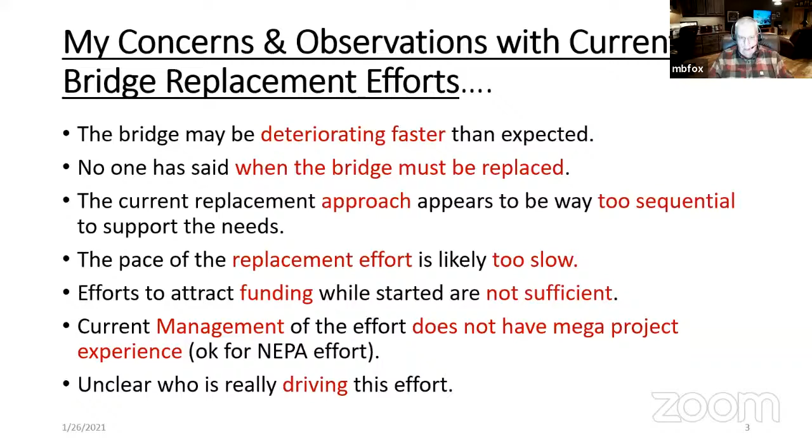The current management of the effort really doesn't have mega project experience. It's okay for the NEPA, okay for the short-term work efforts, but I think is lacking the real clear experience that you're going to need for your program long-term. And lastly, another observation is I don't know really who's driving this effort. It just doesn't come across that there's a single person in charge who's really working to execute this project in an expeditious manner. Next slide, please.

Key question that I really have, and I wish you would really think about: when does a bridge have to be further derated or replaced? It drives everything in your program. When do you have to have your permits in place? When do you have to award a contract? When does the contract have to be finished? When do you have to start this? When do you have to finish that? I don't know of any schedule that you have that really shows that need as being defined.

The answer to this is not easy to derive. It's really going to require an unbiased engineering evaluation and a realistic economic evaluation, because the engineering evaluation will say, hey, you've got a bridge that's degrading and you're going to have to do this to prop it back up. And you've got to have an economic evaluation to decide whether you can really afford to do it.

Now, I know that you went through this about 4 or 5 years ago, but I would really encourage you to get that updated and take a fresh look at where you are today. Has the bridge deteriorated faster than what you thought? What's it look like 3, 4, 5 years down the road? Are you on track? Are you going faster? Are you going slower? If you go to the next slide, please.

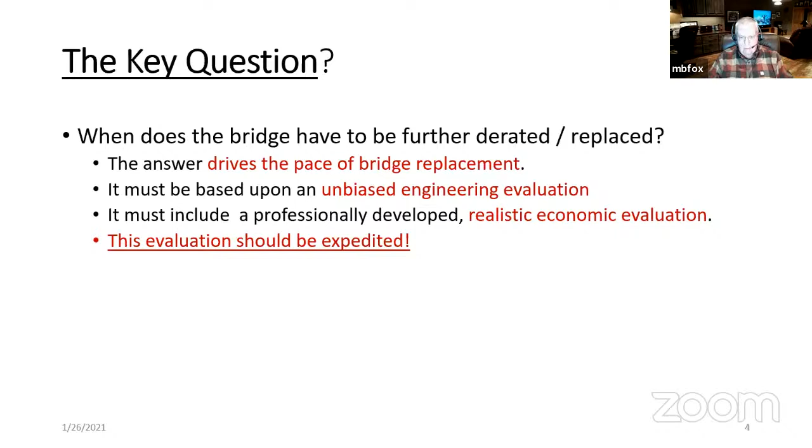So I came up with this, what I call a 9-component strategy. There's no real priority sequence here. I've shared a version of this with Kevin a couple of months ago, and he actually provided some input, as did, I think, Mr. Green, who works for Kevin.

The first one I'd like to talk to you about is determining the need and sense of urgency. That really comes back to what we talked about: when does the bridge need to be further derated or replaced? Without that, you really don't know where you are. If this evaluation says you're good for another 30, 40 years, hey, relax, you're fine.

If the bridge study says you really need to get it done in the next 10 years, you guys are in big trouble right now. So it's determining the need for a sense of urgency. And it's really going to require some real tough decisions by you guys, sticking your neck out a little bit.

But it's got to be done. And if things change, you can always change it, but you've got to put a stake in the ground. And I think it's probably going to say you need to replace it quicker than what perhaps you're thinking you are.

That's going to drive everything you do. The second thing I want to talk to you about is standing up a management organization that supports you, and it's your arms and legs in this entire effort. I think that management organization has got to be driven by a project manager, project director that's very qualified in this kind of work.

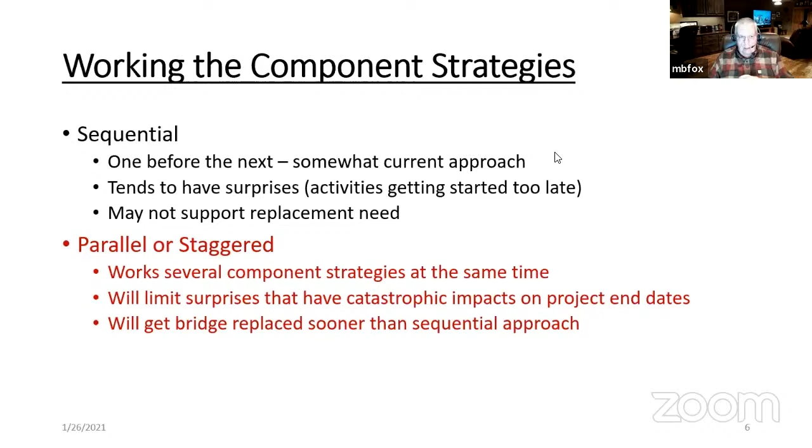Okay, so call for action. I would urge you to prioritize evaluating the current health of the bridge. Get that previous study updated, get new studies, whatever you need to get a real good picture of the health of that bridge and help you decide when replacement has to be in place, whether it's 10, 20, 30, or 50 years. You really need a document you can hang your hat on and use it, monitoring it yearly to see how things are progressing.

Once you decide what that date is, I would encourage you to back up or accelerate that date by at least 6 months, wholeheartedly if not a year, because things are going to happen to your project and things are going to slip. And if you set that date all the way to the absolute dead date, you're probably going to miss it.

I would encourage you, as the commissioners, to either agree or change, but take ownership of this 9-component strategy. Make it your own and really guard it, driving your program to make sure that all of these components are being worked properly.

I'd urge you to get a qualified management contract organization in place to help guide you. You've got this Bi-State Commission that could very easily be rolled up into this particular organization. Maybe you could second some folks from ODOT and Washington DOT into this program. You've got folks right on staff that you could use this approach as a career development opportunity for them.

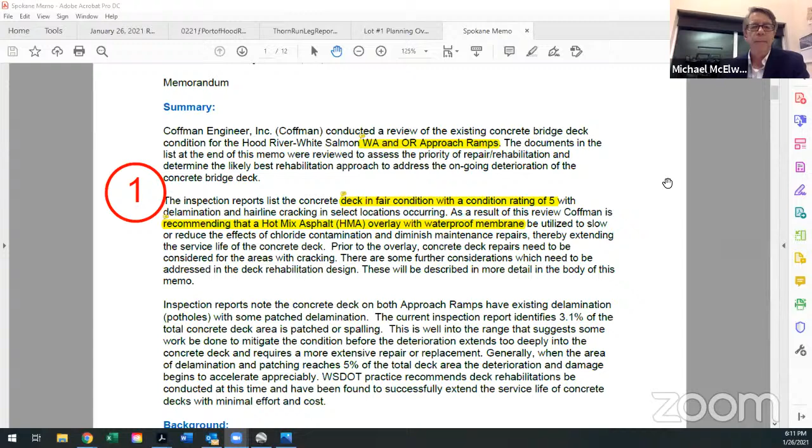All right, thank you, Michael. Am I coming through clear? Loud and clear, yes. All right, good. So I was tasked with taking a look through your existing port bridge inspection records and identifying the condition of the existing structure, mainly the Oregon and Washington approach ramps. You have the memo in front of you here.

I was going to touch on summarizing some of the key elements of the memo, and if we have time for questions, wherever it goes from there.

Having reviewed your existing information, the current condition of the bridge essentially has an issue on the approach ramps of spalling and potholes, requiring patching on each approach. You have a previous recommendation based on the deck inspection to do either a half or full depth concrete deck replacement. My recommendation in this memo is to utilize a 2-inch hot mix asphalt overlay with a waterproof membrane.

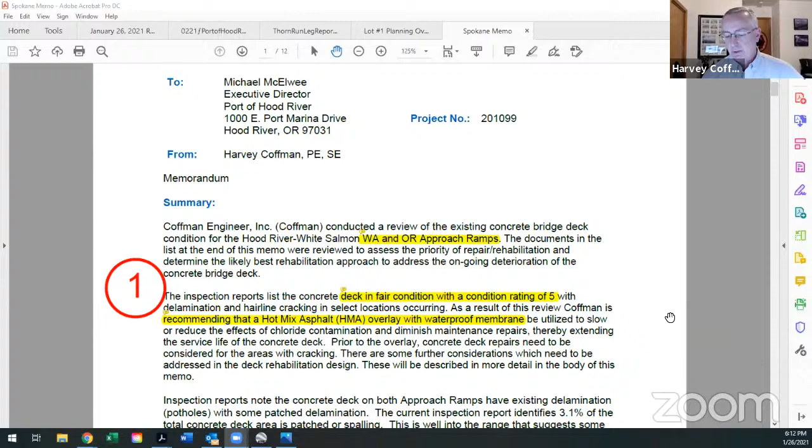The basis of my report tonight is predicated on the current bridge inspection reports, the deck inspection report, and short conversations I've had with John Mann and Michael about the situation out there. Those reports have identified that about 3% of the deck area is either potholed or has been patched, and they identified a chloride contamination concentration above the threshold that's also present in the approach concrete deck.

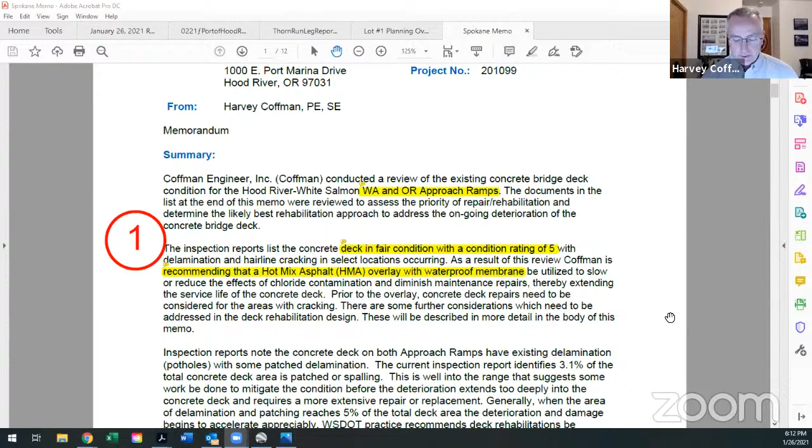So I've got references here in the memo for you to consider. If we can page down to item 3 - those reports identified about 3% overall damage and deterioration to the concrete deck. The Oregon approach has a little more, up around 6% deterioration.

If you look at a model like the one WSDOT uses for their deck program, they have some thresholds, which is the reason I'm reporting on the percentage of deck area affected. In this criteria, they tend to program their decks for overlays when they hit that 2% threshold. That gives them leeway to get the overlay funded and built before the deck area hits a 5% deterioration level. The reason for that is once you get to about 5%, the deck deterioration tends to drop off rapidly, getting deeper in the deck and making the overlay less effective.

At that point you're looking at something more along the line of a concrete half removal or a full deck replacement approach. In this concept, if you repair the damage and deterioration of the bridge deck and put that overlay on, you can improve the quality and condition of the deck and extend its service life.

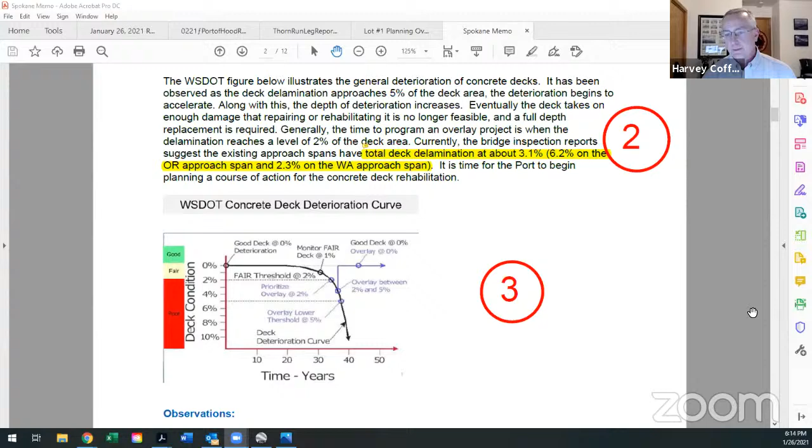In this case, you're right around the level where you want to start thinking about getting something in place to provide that overlay. These overlays can help mitigate moisture intrusion into the deck and smooth out the surface so the wheels ride smoother and the deck below is protected.

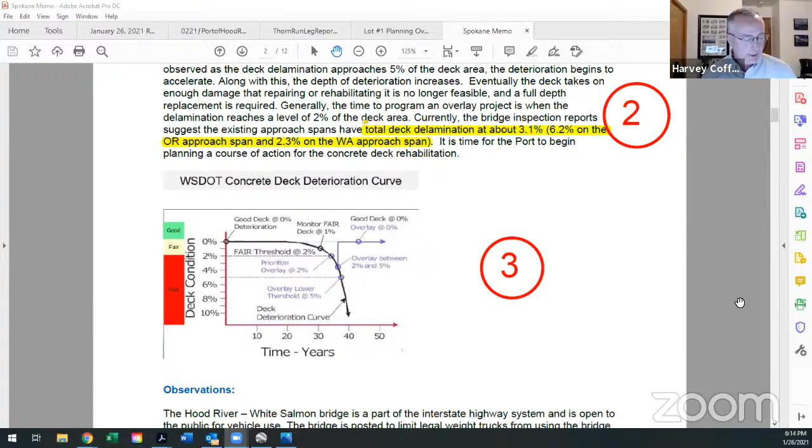If we could page down to item 4 - some of the results and findings of those inspections. The bridge is in a condition state that's fair according to the bridge condition code, or deck condition code, which usually runs from a value of 9 to 0, 9 being excellent, 0 being failed. That demonstrates there's still some residual strength and capability in your deck as it sits today.

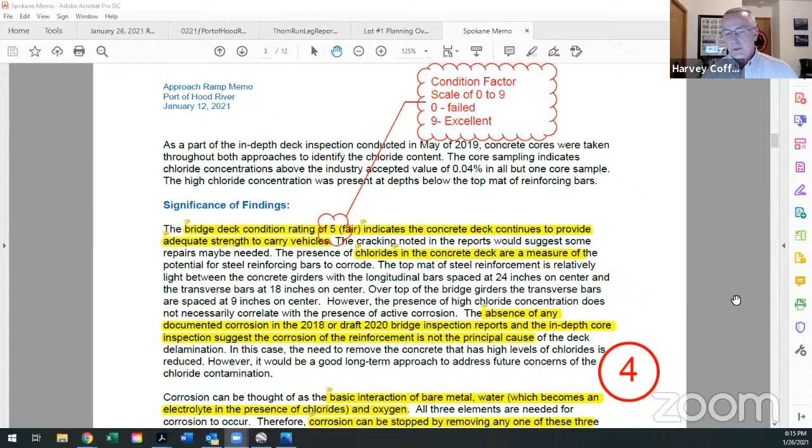The deck inspection report also identified these chloride contaminations, which should be considered in a deck rehab like this. However, the reports don't identify any substantial amount of corrosion going on in the deck, whether the inspection work just didn't look for that or they were looking for other things. So it looks like there's some possibility here of an overlay being a practical solution in this case.

If you think about corrosion as 3 basic components, it takes bare metal, water with electrolytes - in this case chlorides - and oxygen to create that corrosion. You can stop that interaction by eliminating any one of those 3 elements. In this case, we're focusing on eliminating the water that assists the chloride in corroding the bar, and that's the reason for the waterproof membrane and our recommendation for a hot mix asphalt overlay.

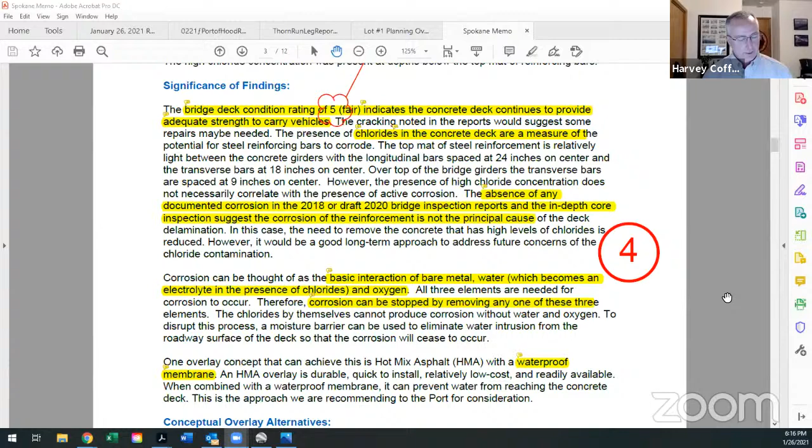If you can page on down to item 5 - to give you some consideration of the different types of overlays that might be practical here, I'm promoting and recommending the hot mix asphalt with the waterproof membrane. Two other possibilities are latex modified concrete and polyester concrete. Of course there's a variation in cost here - these are relative material costs, but the HMA is a very low cost product, very quick to put down and put in place.

The construction cost and the cure time are a couple of considerations to think about in this type of overlay. HMA doesn't require any kind of cure time, so you can put traffic on it almost immediately after construction is complete and that mix is cooled down.

Latex and polyester have other constraints applicable to conditions like rehabbing a bridge deck. They help reduce the weight involved, and can also have extended durability or lifespan. In this case, you're looking for something that's going to get you about 20 years. HMA is very capable of doing that, but with the price factor so low, you could actually probably get away with doing an HMA twice and still be at a lower cost than the other two overlay types. That's part of the reason for recommending the HMA overlay.

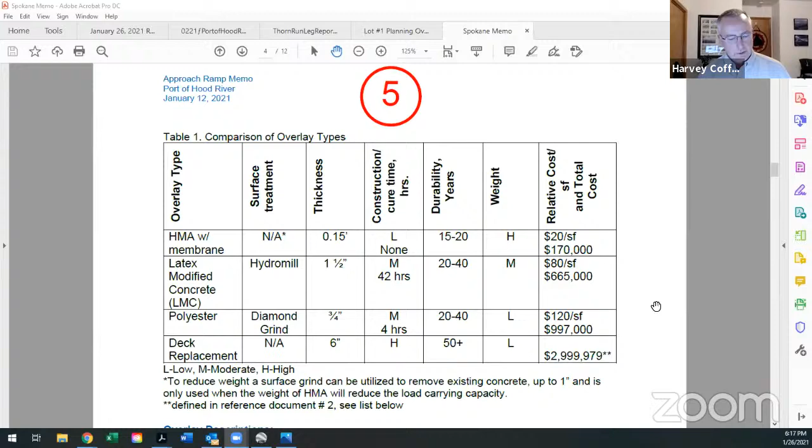You can see the relative cost there. The total cost I'm showing would be for something of the magnitude we're looking at in this project. The deck replacement price was pulled from the previous deck inspection report, so it gives you a sense of the magnitude of variation here. I think the total construction cost for an HMA might be in the $350,000 to $400,000 range.

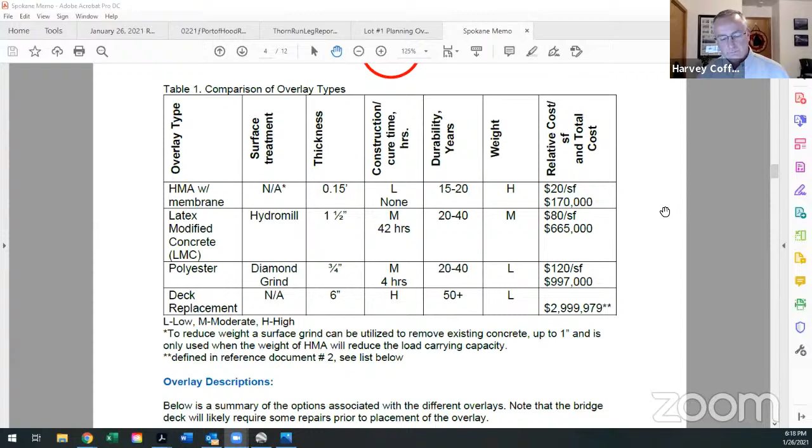We could move down to item 6.

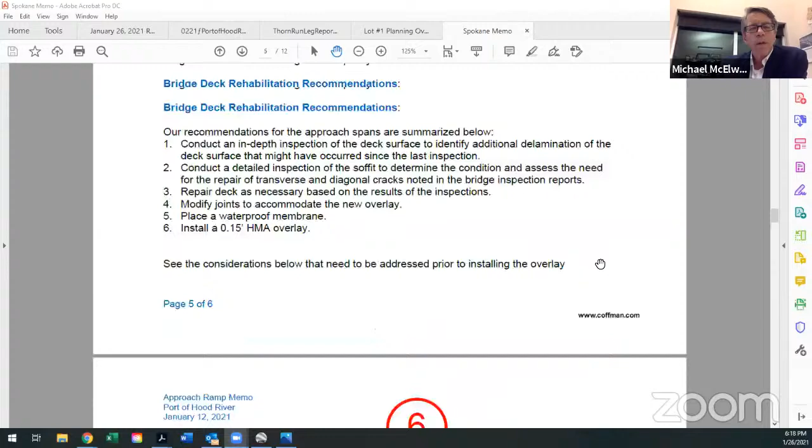Harvey? Yeah. Could you just clarify that last statement you made on that chart? Sure. Did I hear you correctly that the roll-up number ballpark for HMA with membrane was what? 400,000? Yeah, 350 to 400,000.

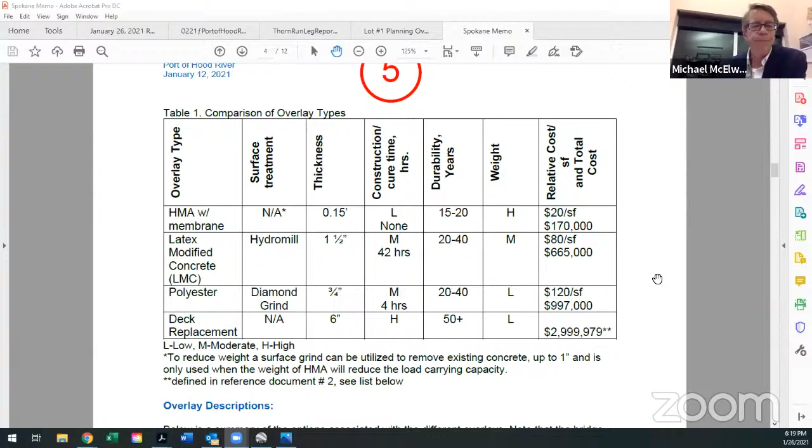I put a quick magnitude cost estimate together at the end of this memo for you, just a quick magnitude to compare relative to what you've been given previously. So am I misreading or misunderstanding? The HMA with membrane on your chart has a ballpark of, say, call it 200,000. Well, these are more based on relative material cost between the three examples I'm showing here. Okay, thank you. So there are other factors that go into the construction of that.

Some things to consider in the application of an HMA, in the context of the recommendation I'm providing, is to go out and put about 2 inches of HMA on the existing structure. There are some things to consider as a result. One is the weight of the overlay—adding that additional weight to the bridge, which isn't necessarily that much, especially given you have an older bridge designed for a lighter truck. However, with the weight restrictions you have in place and will probably be putting on the structure soon, it gives enough capacity to absorb that additional weight on the concrete approaches. But that's something that needs to be considered in the design of this process.

Expansion joints would need to be modified to accept that additional thickness in the overlay. That's typical for a project like this. However, there are also some expansion joint repairs that have been identified, and this could be a time to include those as part of the project.

The weight of the construction equipment, given the restrictions around the bridge and the type of work involved, means you have to look at the type of equipment used to complete the construction. Some of this equipment can be relatively heavy, so as part of your construction contract, you want to identify and limit those types of equipment and how they deliver material on the bridge. You wouldn't be able to use vibratory type compactors, which is typical today, so we have to right-size the rollers to get the right compaction on the bridge without exceeding capacity.

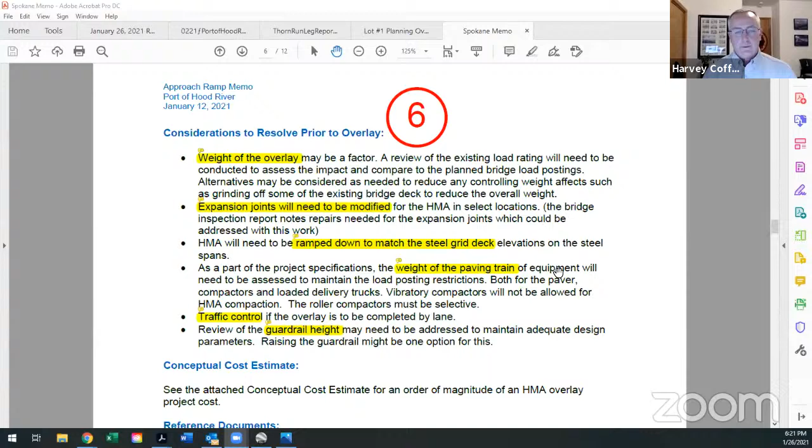And the last thing here is the guardrail height. The guardrail height is important to the functionality of the guardrail, and we'd want to look at the overall guardrail height and how it interacts with the reduction in height related to the application of the HMA. There are a few other factors that play in here, but those are some of the key elements I'm summarizing for you tonight.

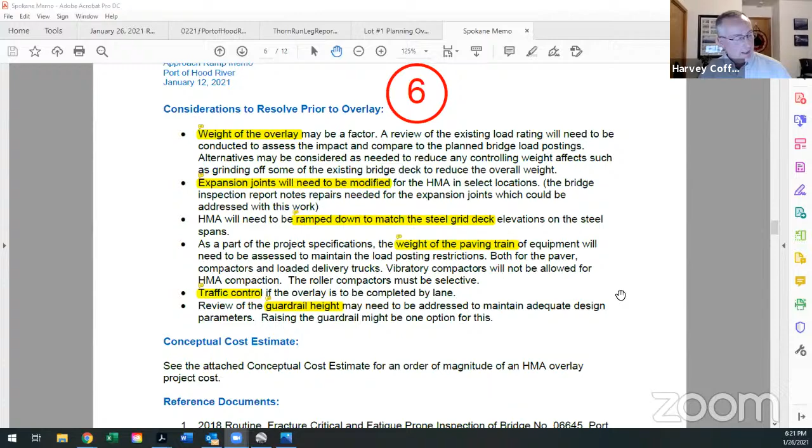The last piece I have is some pictures that John Mann provided related to repairs he did here a couple weeks ago on the bridge. I just want to share that with you so you get a visual idea of what you're facing.

This is a patch location John had taken a picture of. It looks like most of the loose and broken surface concrete has been removed. You're looking down on the concrete deck at the top mat of reinforcement in that deck, and you can see the bars don't look heavily corroded at this point—there is some light corrosion on that bar.

I don't believe that's necessarily enough corrosion in this case to have caused this failure. I think John was saying that the wheel lines are rutted, and the ruts are probably getting extensive enough

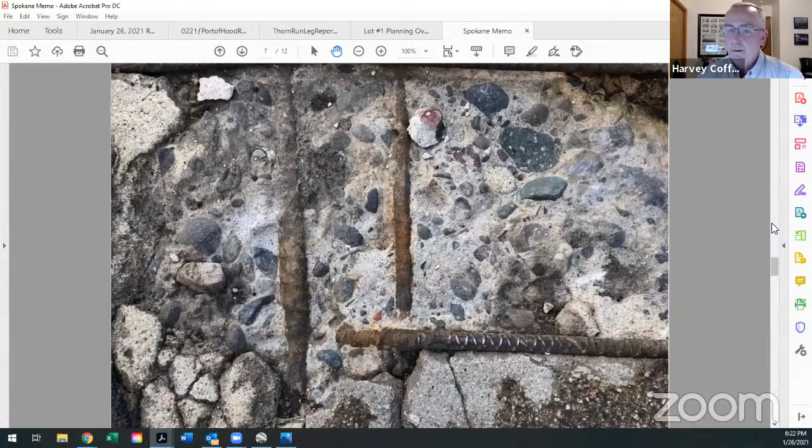where the cover here is thinned down enough that the tires are just rolling over this or breaking it up. You do see pretty good concrete here though. The concrete that remains, the rest of the thickness of the deck is in good shape. You see some fractures in the aggregate, which is a good indication that the concrete matrix is strong enough to break the rock. So you've got pretty good underlying concrete deck there. Another indication that it's still an appropriate time to utilize the overlay process and a waterproof membrane to extend the life of this deck.

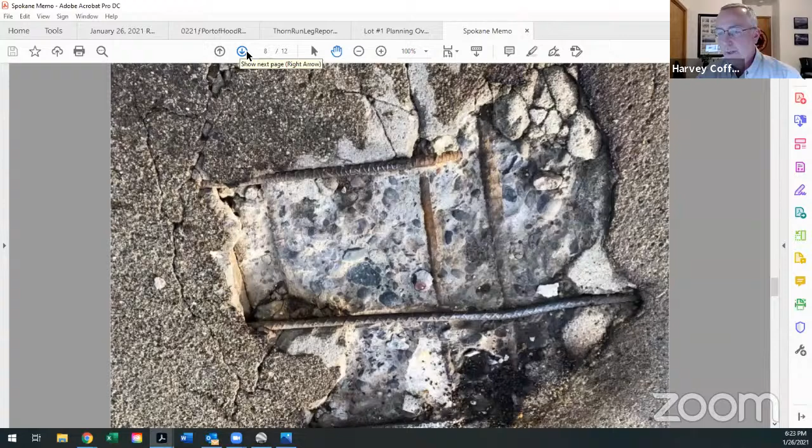I think there's 3 other pictures there. They're really going to show you about the same concept. John, I think these are all cleaned out, or is this the way you found them? That's the way we found them. And then all the little loose edges that you see were there, those all got chiseled out.

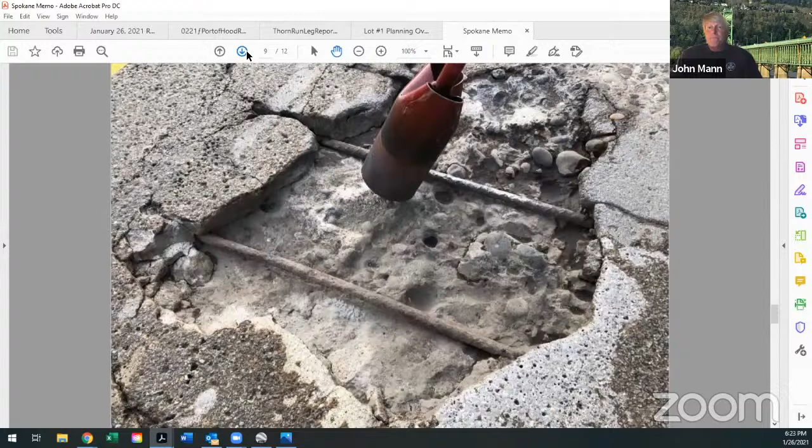Now, is this a previous repair that has broken out? No, you're looking at what's left of the old overlay, the last overlay we did about 6 years ago. That surface just wore off so quickly.

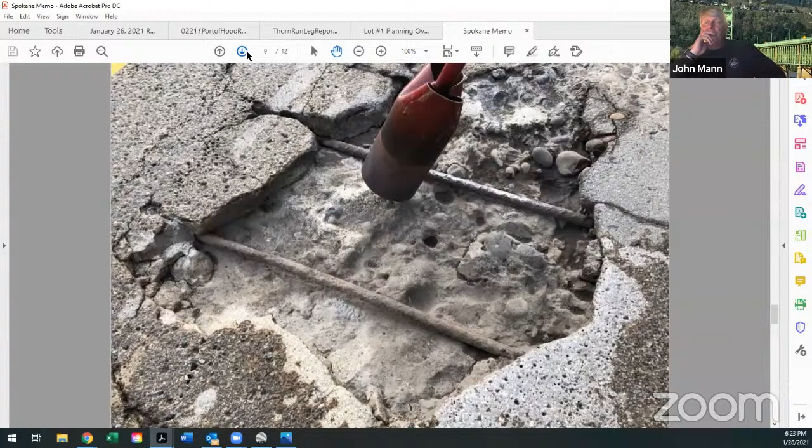So part of the concept here in the process is going out and checking this deck to identify any additional spalling and patching that would be needed just before you put the waterproof membrane down and put the overlay on. Once you get that overlay on top, that tends to lock the deck in, reduces the wheel pounding, it smooths that surface out so the wheels aren't pounding anymore. When you get a pothole like this, the wheels are falling in that hole and they're pounding and bouncing on that deck, and that just exacerbates the whole condition out there.

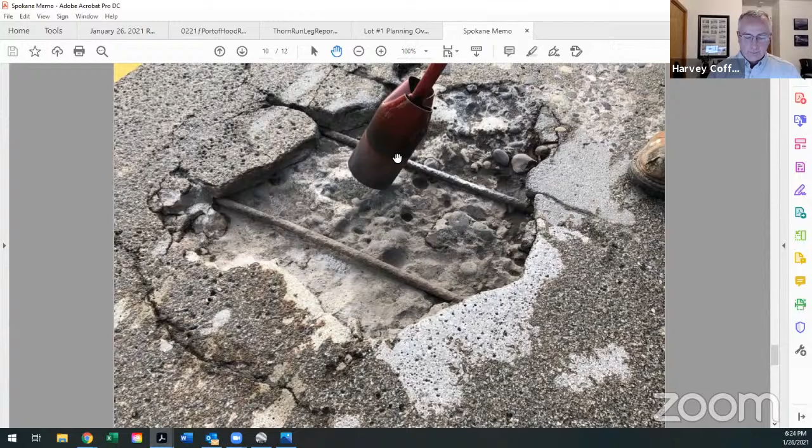So that's a brief account of the memo I provided you. I'd be happy to discuss it further or answer any questions at this point.

seal up that concrete so the moisture wouldn't get into it, you can see that it's worn off. The wheels, more likely the studded tires, are tearing that up and have removed it. So it's not effective at all.

This is Commissioner Shepard. I seem to remember some of our presentations in the past had some of the damage caused by the salt and the chemicals put on the roadways. How does this hold up to that?

So that's the idea behind the membrane. The chlorides in the deck are going to remain in the deck. You really can't get rid of that. But you need the water in there, the moisture in there, along with oxygen, to help create that and cause that corrosion to occur. When we put the waterproof membrane down, that seals off that deck so the water can't get to the concrete deck any further. The asphalt's naturally porous, so you've got to have that there anyway. Otherwise, you're going to hold that moisture against that concrete and it's just going to make it worse, faster. So the waterproof membrane takes care of that and prevents that water from getting down below the asphalt layer.

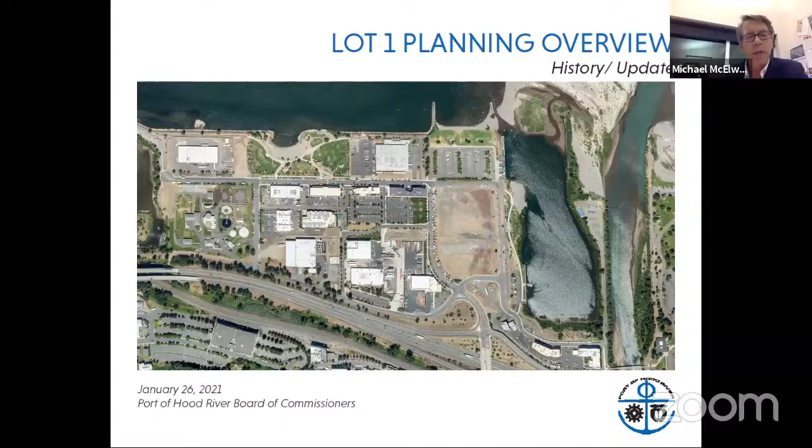So this is 2005, 2006, the way the waterfront looked: no Second Street, no park, no subdivision. The port's boneyard was at the corner of 2nd and 8th and Portway, where the Halyard building is now. If you look to the right of Nichols Basin, you could drive down to a really rough gravel area next to the water.

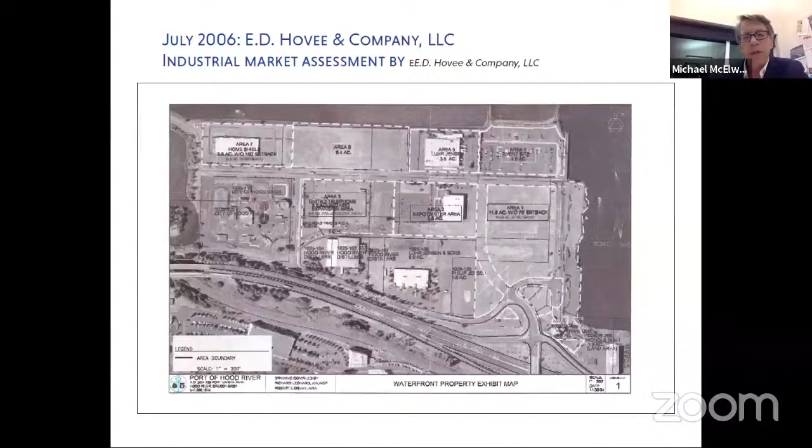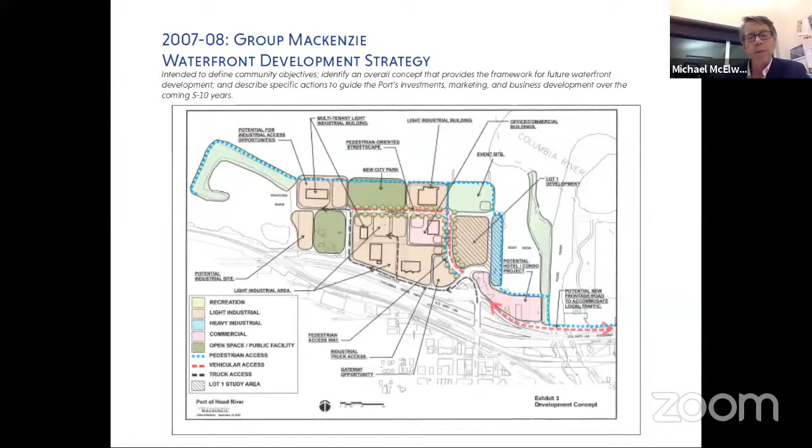A couple of things I want to point out. You see the hatched area, that's Lot 1, and that was specifically called out as a study area, thus the hatching. Then you see the note down where the pinkish area is, where the current hotel is. That was anticipation of the zone change that City Council was then to implement, changing it from heavy industrial to commercial. At that point, the blue area that parallels the west side of Nichols Basin was also zoned heavy industrial. But the major determination was, and Commissioner Streich will remember this, that the strategic approach was to focus away from the water and focus on the area where the current Halyard building is, where the boneyard was, and that stretch between 8th and 2nd, including the Expo Center. That became the focus of the commission's efforts.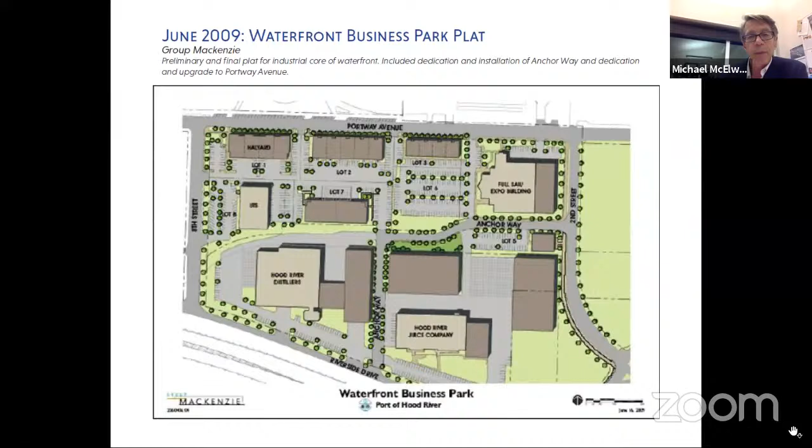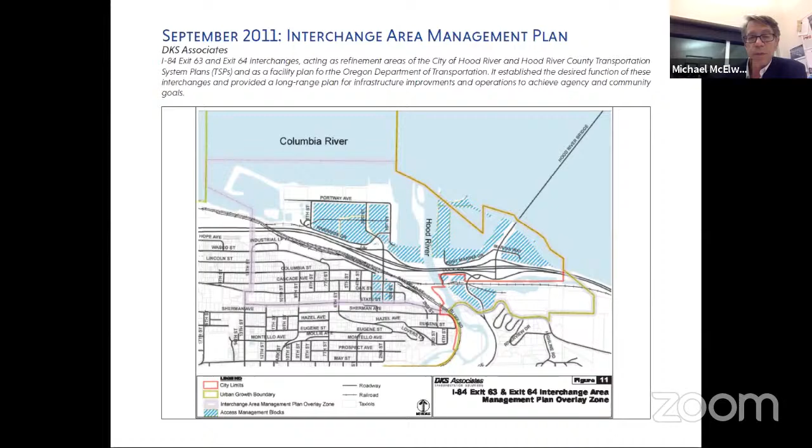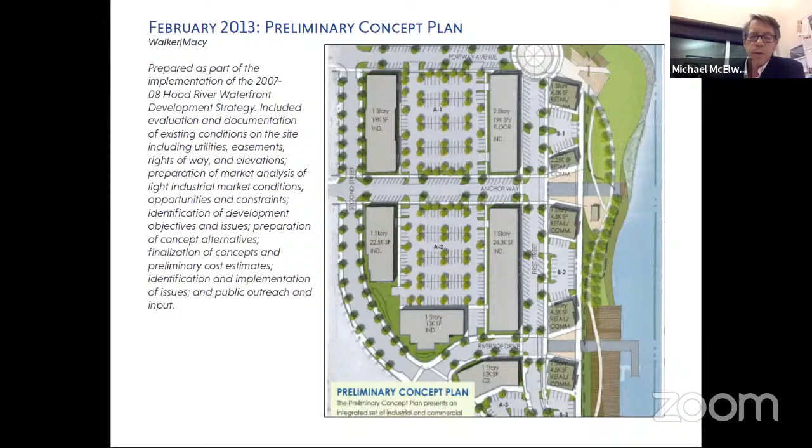Important to point out here: the same approach of putting buildings next to the street, the pedestrian environment, internal parking, and the really important factor of having Anchor Way run east-west through the site. Importantly, you see the nod to smaller commercial buildings in a row, north-south. That was a really important factor, and frankly drove a lot from public input, longstanding public input, to diminish the heights of buildings the closer you got to the water, and really create a strong pedestrian environment that intersected or interacted directly with the recreational and bicycle-pedestrian imperatives along the water.

Next. Then the commission believed it was strategically important to focus on that edge along the Nichols Basin, in a way to set the edge, but also demonstrate to the community this really strong commitment to that ped-bike corridor and water access. You see here there's the Anchor Way in concept form, also running east-west and terminating in a pedestrian plaza, a portion of which is there now.

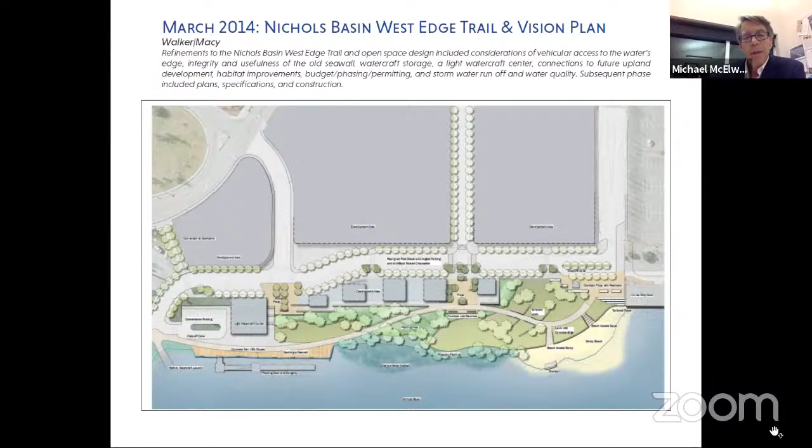And now you see there's a real interaction between this phase of work and the next step, which is the waterfront refinement plan, because what you see is now fewer buildings, smaller buildings, commercial buildings along the now relocated First Street, but certainly pulling back from the event site south. So you see this broad sweep of the park, or future park, coming up around and having direct access to First Street - a really important urban design concept that was strongly messaged to us through the waterfront refinement plan.

Next, and there's a lot to go into here - a multi-year effort.

The waterfront refinement plan was intended - and frankly half of it was paid for by the port - in order to define, maybe not once and for all, but to really fix on what the zoning is, what the legal and dimensional controls were, so that the port and other private investors had certainty for the context they were working within. What this shows is some sub-areas that were identified within the waterfront refinement plan area that had particular focus or attention, and in most cases, specific zoning changes that accrued to those specific sub-areas.

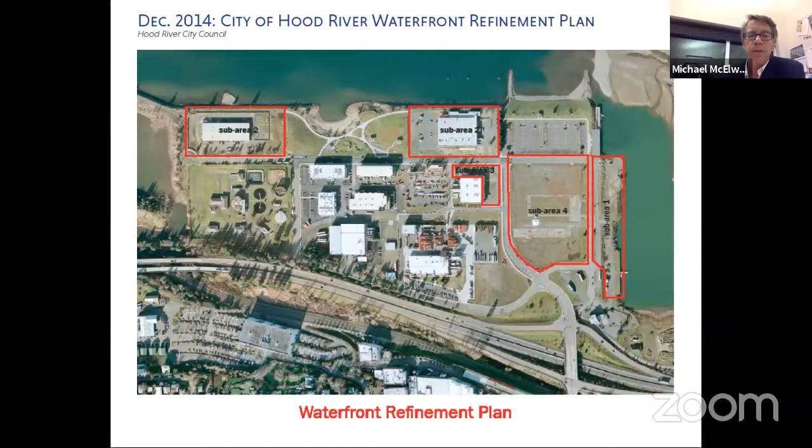And now here you see the concept plan that the Port developed actually became part of the zoning code. This is specifically referenced in the waterfront refinement plan and reflected in the zoning code. This is a sub-area development standard for developing smaller buildings. Though the zone didn't change from light industrial, it has an overlay that effectively allows commercial or retail buildings within a very specific defined limit to be allowed.

So there you see that pullback from the event site south, so that sweep of Nichols Basin Park area can confront, or be adjacent to, First Street. You see a relocated First Street. You see a nod to a future light watercraft facility where the Nichols Basin dock is, and that plaza at the termination point of Anchor Way is developed further - again conceptually recognizing the possibility of a public restroom at that point.

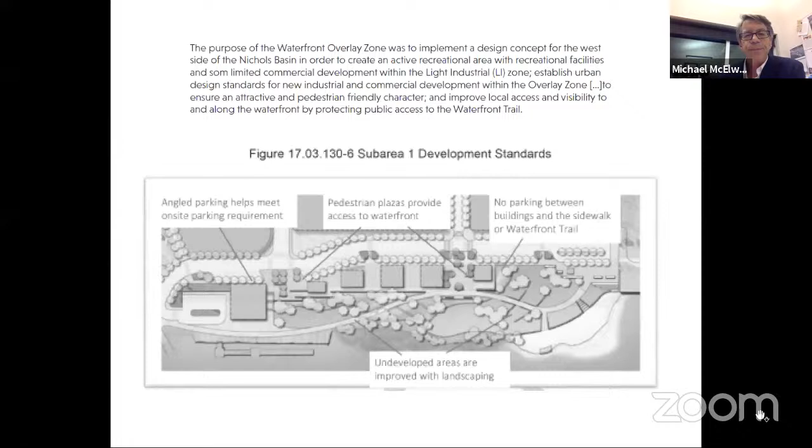Next. And so then the Nichols Basin Trail was developed. It basically comes right out of the zoning code, which comes right out of the prior planning work that the commission developed. That was constructed around 2015, with a really significant public State of Oregon grant that helped build that. Next.

Okay, the next major step was the Lot 1 development plan. This is where we wanted to go much further into the specific layout, utilizing not only the zoning code coming out of the refinement plan, but also the essentially self-imposed design guidelines.

So this is just a concept diagram on the left, which reflects the urban design principles: full-on pedestrian access, internal parking, buildings along the street. You see now the addition of the so-called 'swale,' which runs north-south directly through Lot 1. It's not only a pedestrian bicycle corridor, but a signature feature for Lot 1 reinforcing the commitment to sustainability, since it's an organizing principle for stormwater collection and groundwater recharge, etc. So a lot is behind that diagram, and it's reflected in the more refined concept plan to the right.

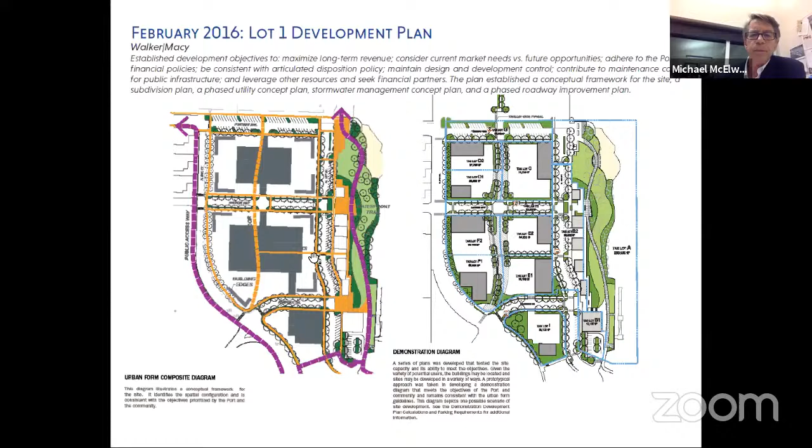I'll put this in because it's a nod to those essentially self-imposed design guidelines that the commission said were important and reflected community input. It was implemented and enforced through disposition and development agreements with individual developers as they constructed buildings in the waterfront business park. It's a commitment to sustainability, to the pedestrian environment along the street, etc.

And also a commitment to festival streets and really multi-use areas, plazas, and sometimes the street can be blocked off, a commitment to access to recreation and all that.

Okay, so now about the same time as we developed that last concept plan, Key Development retained an architecture firm in Portland and took a really hard, long look at Lot 1 from their perspective. What I've pulled out are just, say, 4 slides, but this was a really detailed presentation. It was quite impressive and remarkable in the amount of time they spent.

They looked at the context of the gorge, the environment, and the history, and they looked at the design inspirations, design imperatives, and such. This was then presented to the commission to allow them to see what their ideas were.

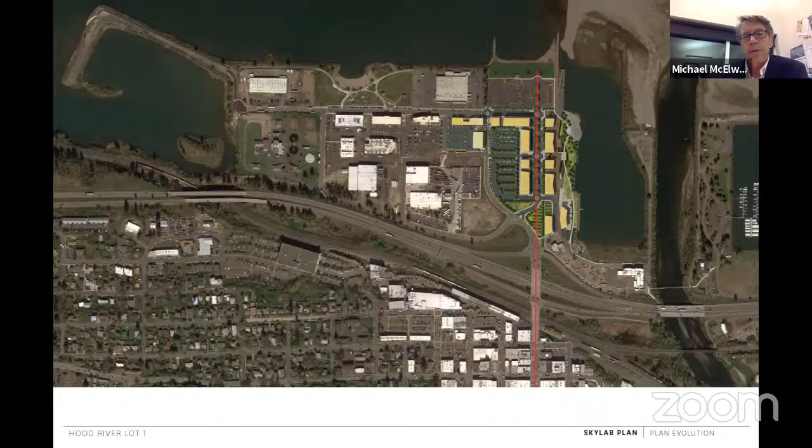They've organized that around that corridor, and they've essentially co-located the small retail or commercial buildings from the prior concept into larger two-story structures, so that both sides of the street are essentially taller, denser buildings, with a combination of ground floor retail and upper story commercial or appropriate industrial businesses.

This is a closer look at that. You can see there's a lot of eye candy here, which is not a criticism, but there's a lot here that is very, very unlikely to be implemented. But you can see that organizing principle of a relocated First Street, and you can see that two-sided street with tall buildings, not the shorter ones on the Nichols Basin side.

The concerns about this layout are many, or at least they're important. This aggregates most of the parking in one large parking lot that borders Second, which is sort of the major gateway to the waterfront, and that was a concern.

The fact that the buildings along the east side of First Street don't conform to the zoning code, and in a way, almost more importantly, they create that taller, denser wall along the water's edge, or near it, that was so important to so many people before.

Access to the site is essentially a reconfiguration of the Riverside and Second intersection, which would require significant approvals and use of ODOT property. And importantly for our work looking ahead, Anchor Way, that east-west extension that bisects Lot 1, is not in this in a way that would be approvable by ODOT or the city.

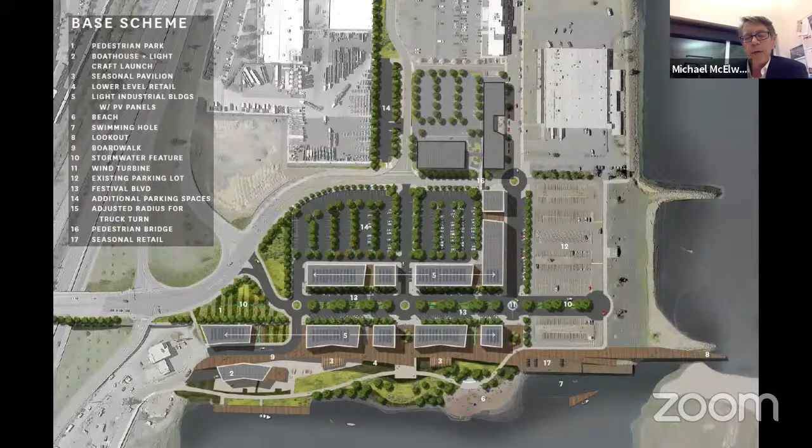So this is looking back to the prior plan the port developed, which is in some ways pretty consistent with the Skylab plan. It has a lot of the same things, but it reflects the zoning code and its limitations. It acknowledges that Anchor Way is an important component of any development or build-out of Lot 1, and it retains that two-sided street, First Street, but recognizes the strong desire to make sure buildings along the water's edge are smaller, pedestrian scale, with amenities connected to the bike path.

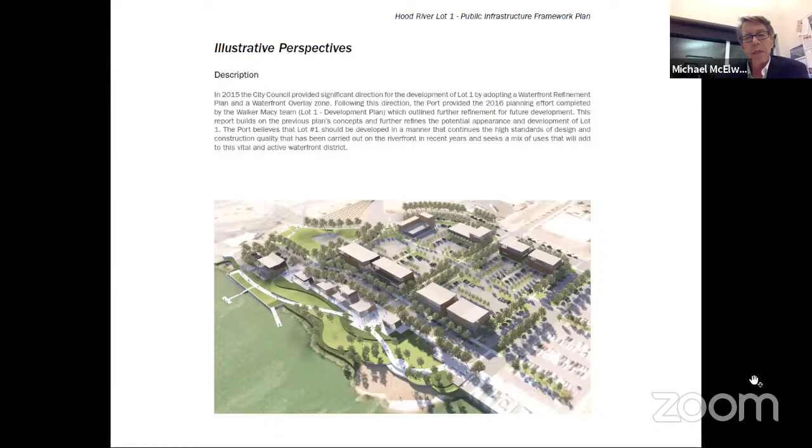So the next step was the development of the infrastructure framework plan, which said based on that planning work, here's what we have to develop or anticipate in order to implement the plan. I won't go through it all, but you've seen this before - very significant, probably $7 or $8 million worth of hard infrastructure, and we identified $5 or so million worth of soft amenities: increased pedestrian access, boathouse, docks, and that sort of thing.

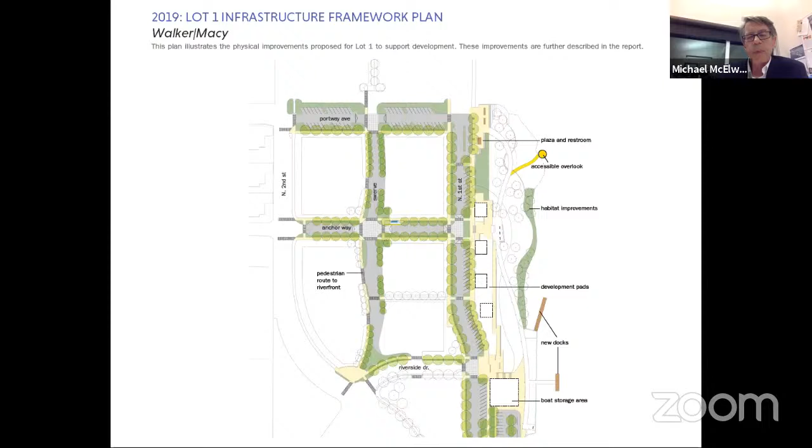This again reflects the organizing principle of the swerve north-south through First Street or through Lot 1, and then Anchor Way crossing through. Importantly, from a transportation standpoint, Anchor Way provides that alternative egress point that is a fall-on-your-sword issue for ODOT. They anticipate a point where the Second and Riverside intersection will be non-functional for left-hand southbound traffic. There was a different conclusion reached by our transportation engineer who looked at traffic, but that still remains an important limit or issue for ODOT.

So then after the framework plan, we worked with the Urban Renewal Agency in the hopes that this could be a compelling argument or use for tax increment dollars, which are really poised and intended for infrastructure that can draw private investment. Anchor Way was fleshed out in detail, at least conceptual detail, in the infrastructure plan. Here's the project sheet for that, about $1.5 million.

And you can see that project would be a real cornerstone for future development of Lot 1, not only from a transportation standpoint, but also a utility standpoint. I think most of you know why that project would be such an important step in organizing utilities, transportation, and even transit. So that's a little bit of still a look back.

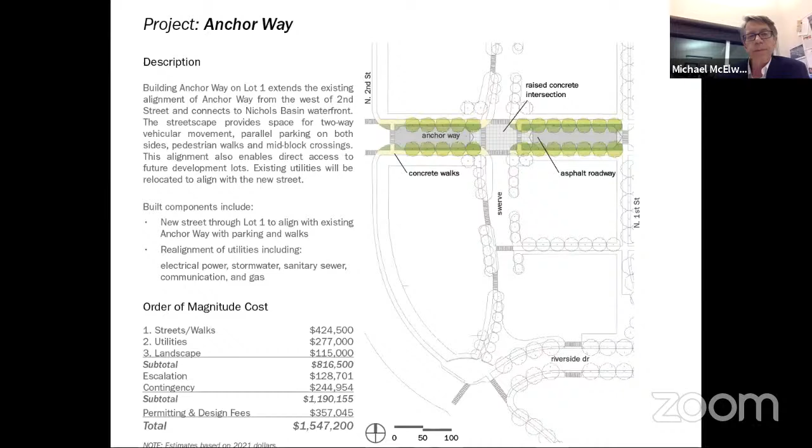But then if you go to the next one - this was a subdivision. We applied and received approval for a preliminary subdivision plan. We've talked about this. Of course, the challenge is that by entering into the agreement that would allow us to receive final plat, we would need to essentially implement at least all that hard infrastructure within 5 years, at that $7 or $8 million cost.

And there would probably be an expectation that there would be additional soft projects done - plazas, restrooms, access to the water, docks, things like that. So we did receive approval, but the determination the commission discussed was that we were not in a position to move forward on that without urban renewal funding to help.

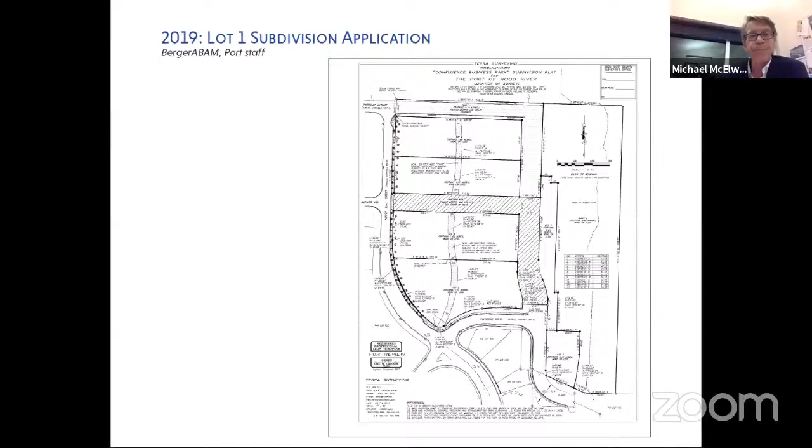And I guess that's it, other than to say that as the commission knows, we've taken the first steps towards the Anchor Way more detailed description from an engineering standpoint and a cost update. We've also started discussions with ODOT, Business Oregon, and the Economic Development Administration for grant approval.

We've also started discussions with CAT and MCEDD because they believe there's potentially a significant opportunity for grant funding from a transit standpoint.

The ODOT Business Oregon discussion is for an immediate opportunity grant called the Immediate Opportunity Fund, an IOF grant, and they are very positive about that. We received one prior for the work done on Anchor Way, which is really helpful.

The preliminary discussions with EDA, they saw that prior $500,000 grant for the waterfront subdivision, which improved Portway, put in the turnaround at the end of Portway by the hook, and was a component financing piece for Anchor Way.

They see that as a huge win. It was a private investment that stemmed from, and that was just a part of it, but from their investment was, currently we're somewhere around $75 or $80 million. So they're pretty keen on taking another look at this next phase 10 years later.